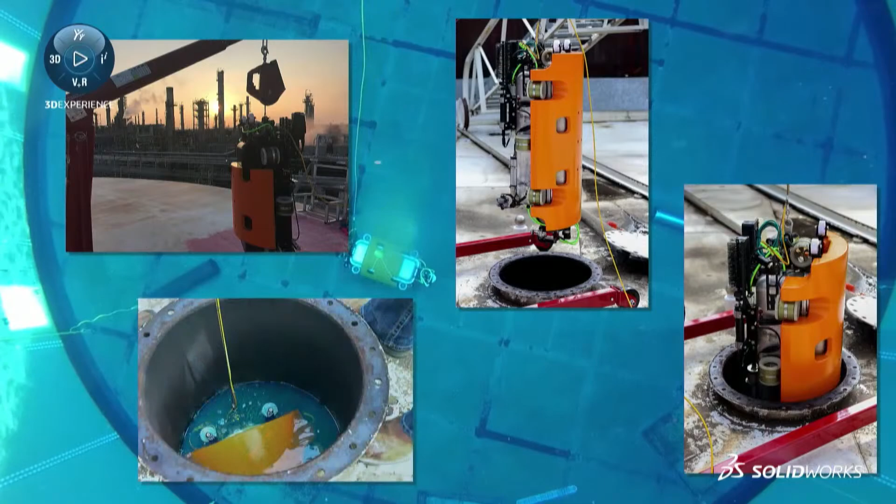Their design is focused on safety and reliability for these unique environments, providing maximum uptime and allowing inspections to take place when and where humans would have to otherwise wait for the tanks to be empty.

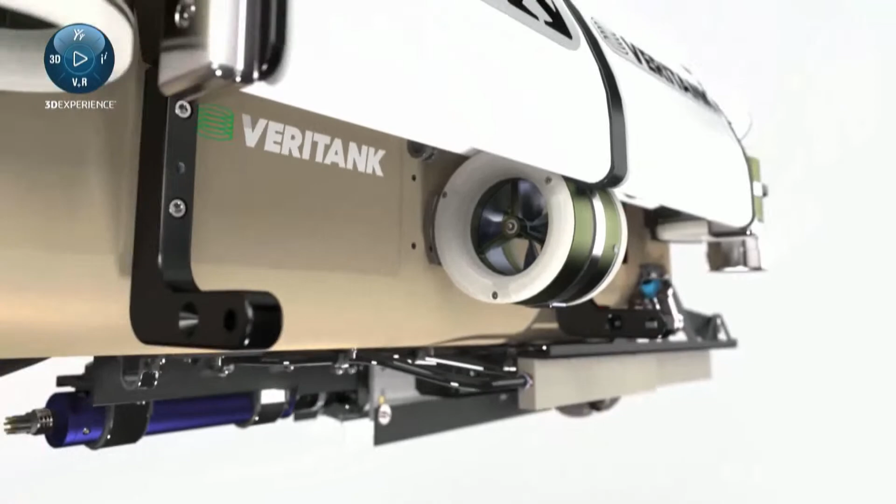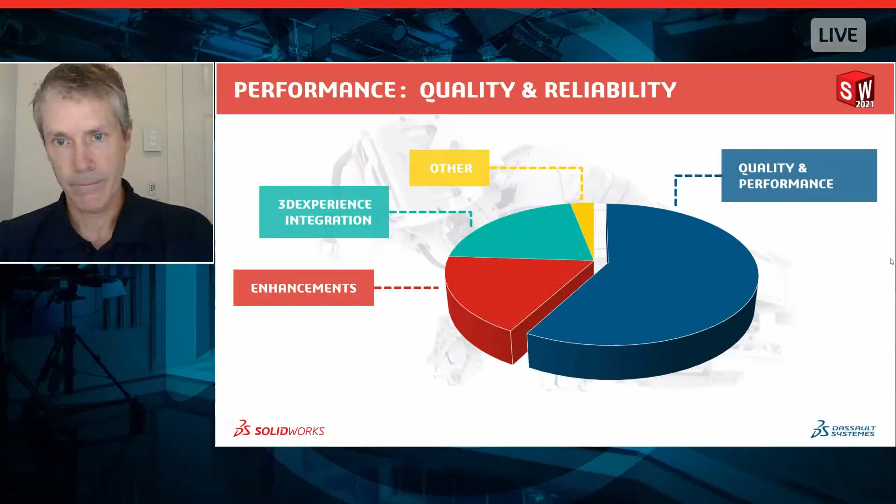Sure. I think the next slide shows that bugs come in with all different kinds of bug types. Maybe it's a workflow bug, maybe it's a behavior bug where it's not functioning properly. So there are different levels of bugs, and we try to categorize things to help us prioritize what to work on. We have other metrics that help us prioritize, related to the number of customer hits on a bug and how critical it is, and so forth.

So what you see in this graphic, things to the upper right are the most critical bugs—those that get the highest priority. We've done a good job historically staying on top of those and fixing them for customers. But the backlog of the other bugs, not in that top quadrant, has grown over the years.

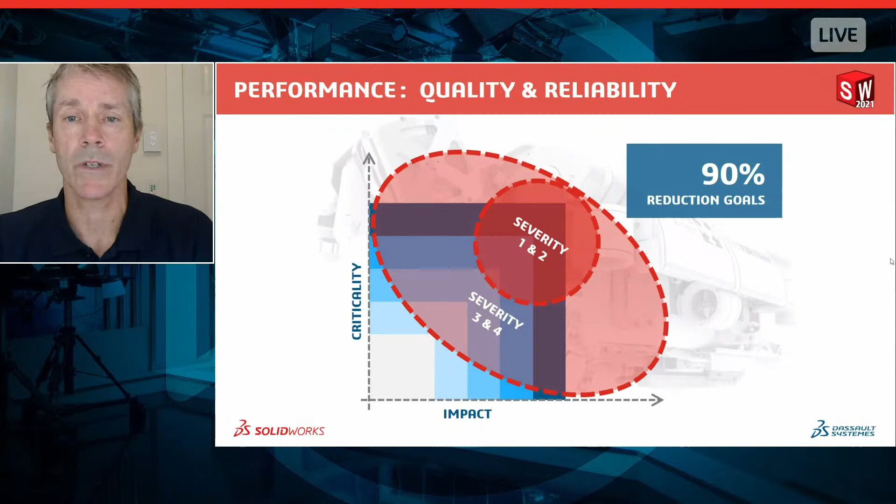So we have a backlog of those bugs, and what we're showing here is a goal we have—a 3-year goal, and we're just past halfway through it—to drive down the bugs shown in the circles, what we call severity 1, 2, 3, and 4. Those are medium and high impact bugs, workflow bugs, crashes, or any other bug of that type. So the goal is to drive down the backlog to 10% of what it was when we started. It sounds aggressive, and I think the numbers show it.

You've shared some feedback and data with me about what this means in terms of our investment into this, and how customers will really gain an immediate benefit. One of the things we see this year is a substantial increase in the number of these bugs that you guys have closed. These aren't necessarily things that have a button or a feature associated with them—this is really just the software responding and acting more how our customers anticipate it will. Is that correct? Can you clarify that a little bit? Like, these aren't necessarily features that improve performance or quality, these are just fundamentally making the software work better, correct?

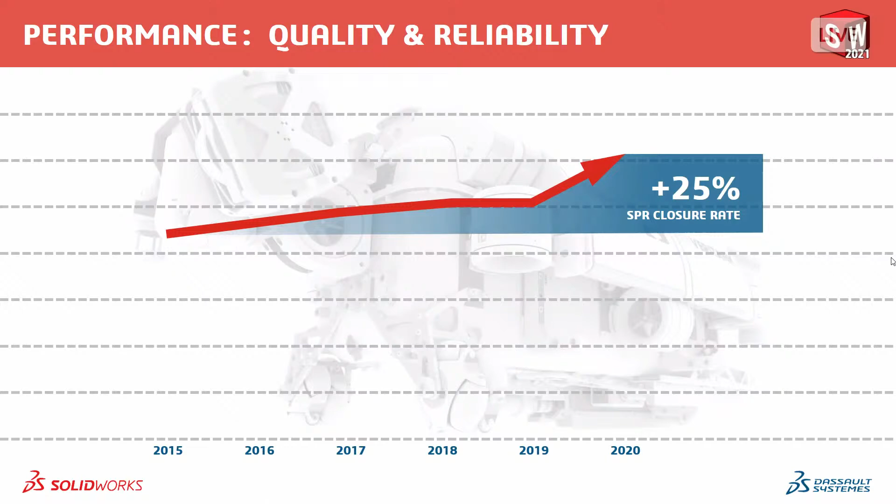True, yeah. What we're showing here is really bug-related stuff, not necessarily performance—there are performance bugs, but this is a graph showing the quality-related stuff. I looked back to see how we're doing with this renewed focus, and I looked back 10 years. Developers have actually fixed more bugs in the past year than any time in the past 10 years. You can see the graphic here—we're not showing 10 years, but it's a 25% increase over what you might have felt 5 years ago. That's going to make for an amazing release for everybody using the software.

Now, one of the things we also want to talk about is performance. Something we introduced last year was called enhanced graphics performance. Last year this was an optional feature inside the software that you could enable or disable. Can you tell viewers at home who maybe don't have SOLIDWORKS 2020 yet, or haven't enabled this, what enhanced graphics performance is?

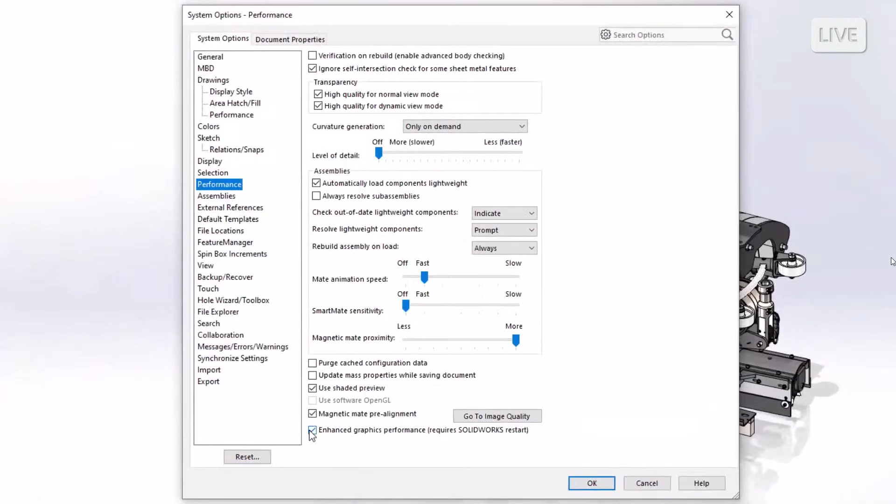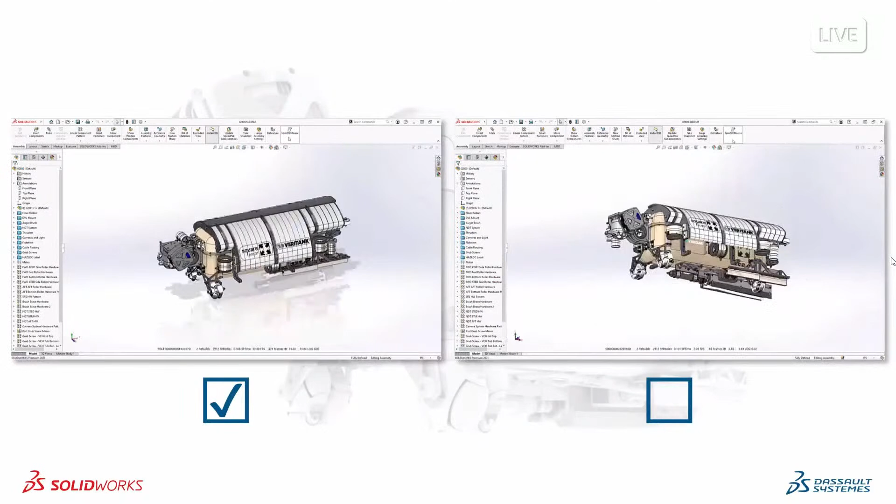Sure. Yeah, so we took a multi-year effort to basically re-architect our entire graphics engine—that's what you'd see in the model screen area, not the UI, it's the part and assembly display window. We've re-architected that, with a team of people working on it for quite a while. As Jeremy said, we rolled it out as a beta in 2019. It's available to everyone in 2020, where you can turn it on. And in 2021, it is on by default now. You can see here some of the performance improvements—the graphics team has done a fantastic job, and what you will see is a performance improvement. That's the biggest impact that customers will see.

If you haven't enabled graphics performance, I highly encourage you to do it. You'll see a lot of places in the software where it's being impacted. New in SOLIDWORKS 2021, we're continuing to augment enhanced graphics performance.

One of the new things we've seen is better leveraging the GPU for calculating things like silhouette edges, and I believe that's one of the new things here as well, in hidden lines removed and hidden lines visible mode. So kind of like what you saw there, we're continuing to invest in this technology. That's the plan moving forward, right, John? We're going to continue to invest in this graphics performance technology.

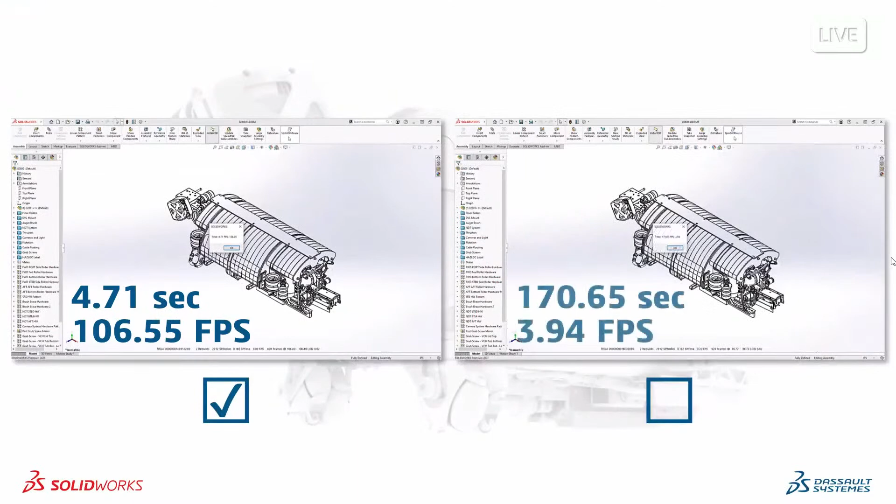Yeah, absolutely. Sid and the graphics team already have a plan. We're starting up on the next major release, and we've been enhancing it since we released it last year. So in 2021, we've added occlusion culling, and we've improved the silhouette edges you mentioned, done on the GPU, and we've done the re-architecture for drawings as well. So you'll see a very large improvement in the performance for drawings.

Yeah, so occlusion culling is interesting. This was something the video we had on screen is actually something with a special developer option, we were able to freeze what was being rendered on screen. So it's actually really intelligent - not only are we letting the graphics card handle a lot more of the work being done, but we're also being much more intelligent about how we're doing things there.

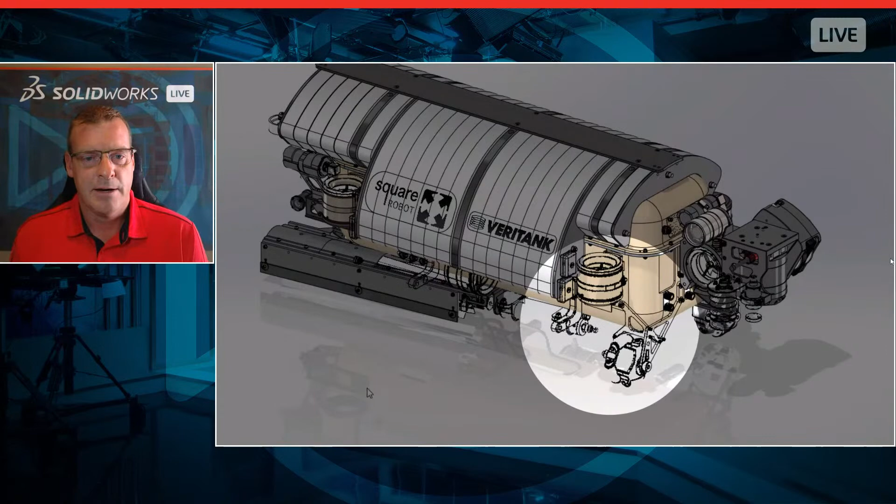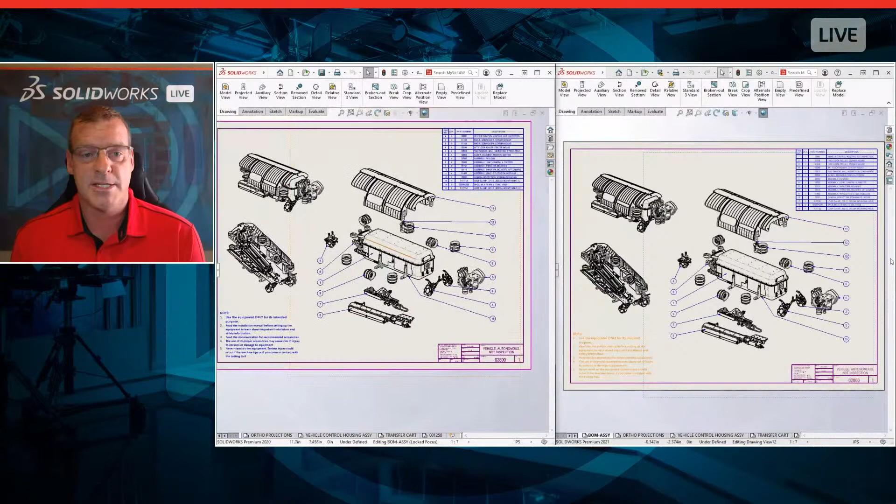You had also mentioned drawings as an area we're focused on. New in SOLIDWORKS 2021, all this great technology is now being handled in the drawings environment as well. So users who are doing large complex drawings are sure to see massive graphical performance gains while working inside of your drawings. This is just an example again of what it kind of felt like without graphics performance enabled versus what it looks like with graphics performance enabled.

This is really cool stuff, John. I know Sid is really the guy responsible for this, but I think you've iterated it. This has been a long-term commitment, and I think our customers are really going to benefit from this for the long haul in what we're investing into this.

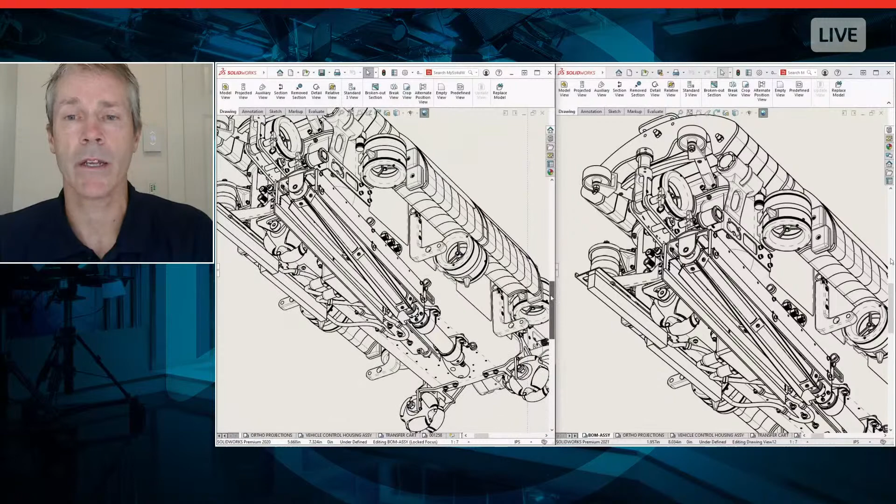Yeah, we've got a great team working on it, and it's been a huge focus for us for the past couple of years. It's really nice to see it hitting the street and on by default, and we've seen a lot of feedback during beta. People are feeling it - you're gonna feel these performance improvements this year, especially in drawings, since it wasn't even enabled last year.

So for anybody interested in learning more about this, you'll want to make sure you have the latest certified graphics drivers for your certified graphics card enabled. You can go to the SOLIDWORKS support webpage to check that your graphics card has the latest graphics driver. I believe OpenGL 4.5 is the one requirement you have to have in your graphics driver to really take advantage of all of this.

So John, this is really exciting. I think you mentioned it already, but it will take advantage of the GPU, which is a change compared to several years ago, right? We wouldn't always take full advantage of the GPU. So the better card you have, the better performance you're going to get. We are maximizing the GPU, which is a critical piece of your machine.

Customers who always invest in a really strong and powerful graphics card are definitely going to see big performance increases with this.

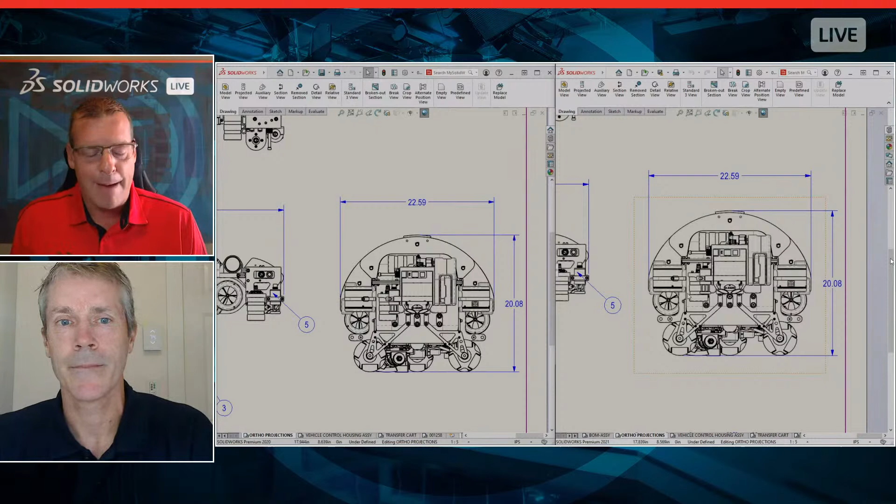So John, you guys are kind of at the end - you guys are wrapping up your development cycle for SOLIDWORKS 2021. Do you get to rest, or what's happening now? Or are you diving right into the next release?

We are diving in. We have our R&D kickoff meeting on Monday for what we're planning to do with 2022. The planning is done for the first portion of it, and we're starting work next week. So exciting! Keep going, John. Well, it never ends. Hopefully we have you here again next year when we're looking at SolidWorks 2022. Really excited for this release, but let's not worry about what's going to happen a year from now—let's focus on the great release here.

We have a part here that we want to create a cut and pattern that cut around. We have a sketch available, but you'll notice the sketch color and the part color are very similar. In SolidWorks 2021, we make it easy to find that particular item to change its color by adding this column of colors here. It's a nice delighter—we can change that color to something a little more contrasty.

Now, before we actually create this cut, I want to show you one exciting enhancement: you can collapse the command manager. This just moves everything to the top of the screen, giving you a lot more screen real estate so you can dive into your designs and really focus in on what you're trying to do.

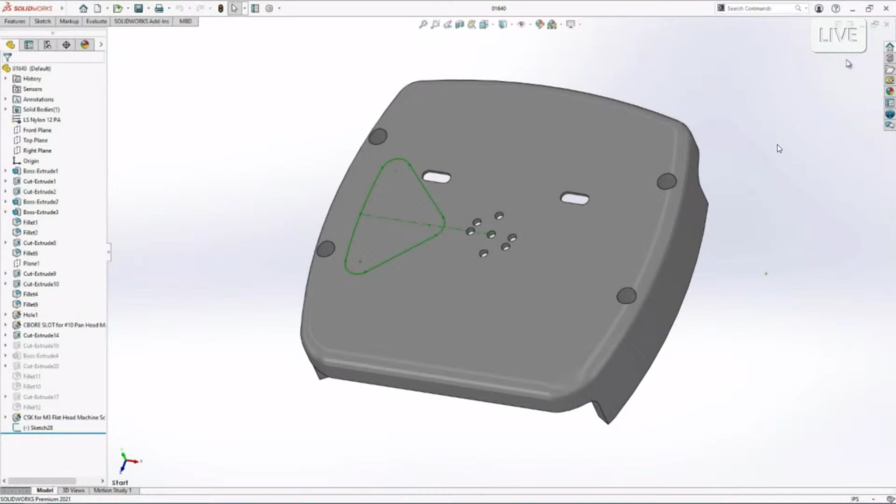I absolutely love this, Mark. I have a really large format monitor—I can see myself collapsing the command manager, maybe collapsing the feature manager tree. But unlike going full screen mode, I still have access to that command manager up at the top. Maybe I can call this stealth mode. Yeah, definitely you can call it stealth mode for sure.

If we want to get even more stealthy, there are some items at the top of the screen, our quick access tools, that we might also want to remove from the user interface to reduce clutter. We can put those in the command manager now, and those are kind of hidden from the screen as well, minimizing our user interface. We still have access to all our tools at the top of the screen, but a better, faster way to work is using that S key keyboard shortcut, which most users will be familiar with.

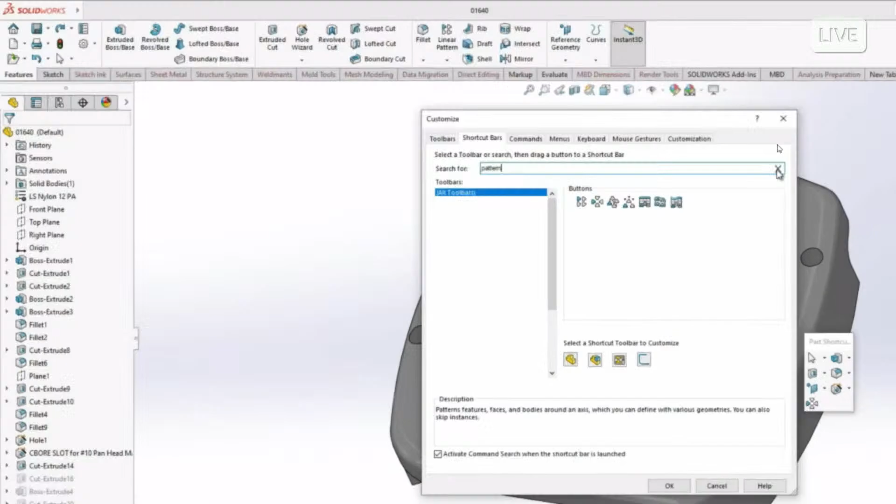New in SolidWorks 2021 is the ability to search for these commands now, rather than having to pick through a big list. We can search through those, add commands like the circular pattern to our toolbar, and customize our toolbar all over the user interface very simply. So here you can see I'm ready to work—I've got all my commands right where I need them, right at my fingertips, using that S key keyboard shortcut.

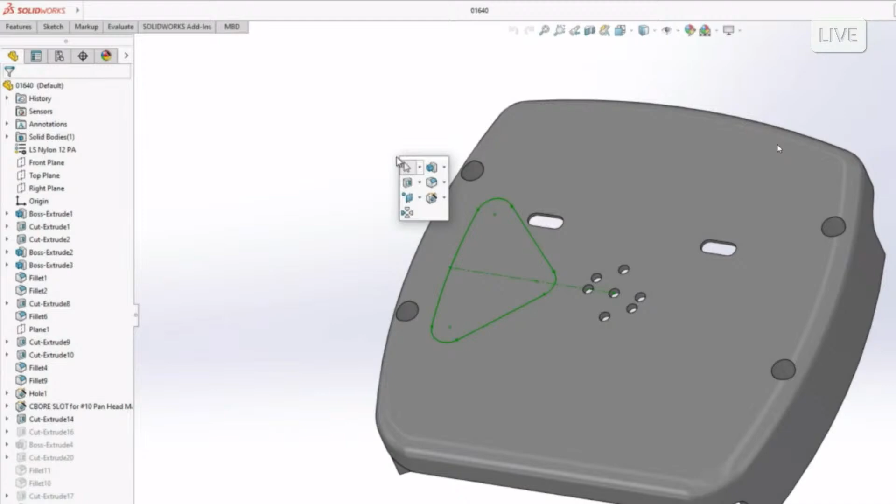That is so convenient. There's so many times where we're wanting to customize our interface, looking for the command that we want to add to the shortcut menu—this makes it so much easier. And for those who might not know this, you not only have the shortcut menu, but you also have command search in the upper right-hand corner. This really brings that whole idea of not needing to move my cursor all over the screen—it's really going to make me focused in on my work.

As you watch me perform some of these tasks, I'm only going to use the S key shortcut toolbar as well as the right click menu. I'll create that cut quickly through all, then use the S key keyboard shortcut to pattern that around the face and confirm it. Not only do we not have to go back up to the command manager to grab those tools, because we were able to customize our user interface, but I was really able to focus in on my design and get to work and be very productive.

So now I see why you actually hid the command manager with that new option. That's because you're able to do so much with the shortcut menu right there. You really didn't even need to access the command manager while you were doing that.

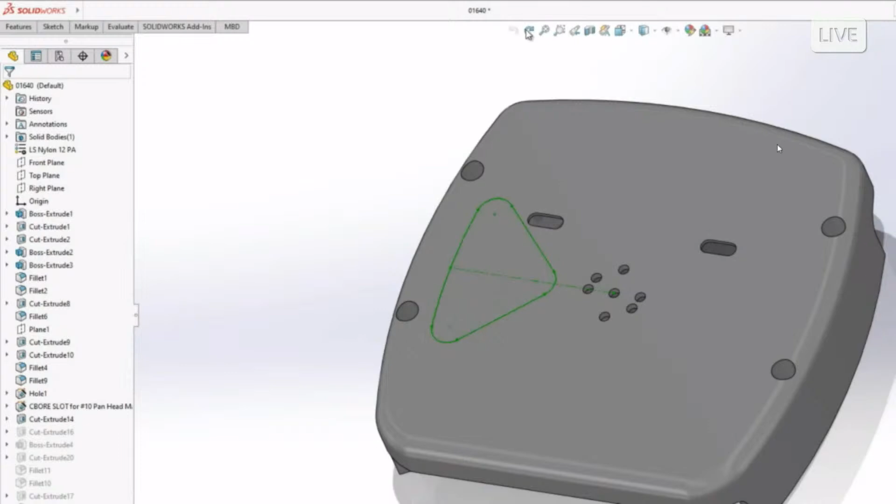Yeah, that's right. One last thing I really like: I use undo all the time because I'm not perfect, I make a lot of mistakes when modeling. Something really exciting here in SOLIDWORKS 2021 is that if you undo a feature, maybe one too many, you now have redo. So you can just get those features right back. You don't have to recreate them, and that saves a lot of time.

Yeah, I think users will really appreciate that. I know when we introduced unlimited undo all the way back to file open, users were really excited about that. I'm going to assume we can use the hotkeys Control Z and Control Y here. I remember you could just undo and accidentally go too far. So now you're saying I can roll that back forward if I accidentally did that. That seems like a really useful thing for people who get a little zealous with a keyboard.

Yeah, and this works for most commands in the part environment. We have 60 plus commands that this works on. So with all of those enhancements, we're really just trying to help new users and advanced users alike customize and adjust their user interface to their liking, so they can focus in on their design and be super productive.

Well, one of the things we mentioned early on is we don't have time to show every new feature coming in SOLIDWORKS 2021. So when it comes to the user interface, Mark, was there anything you didn't get to show here that you would encourage people to attend a reseller event to learn more about?

Yeah, there's definitely one. There's this mechanism now where when you want to edit a dimension, instead of opening the property manager first, it just opens the modify dialog first. It sounds like a small thing, but because you perform that action so many times in a session, even just a couple of seconds here and there really adds up to a lot of time saved. It's a really amazing enhancement, something we didn't show today. And there's a bunch more.

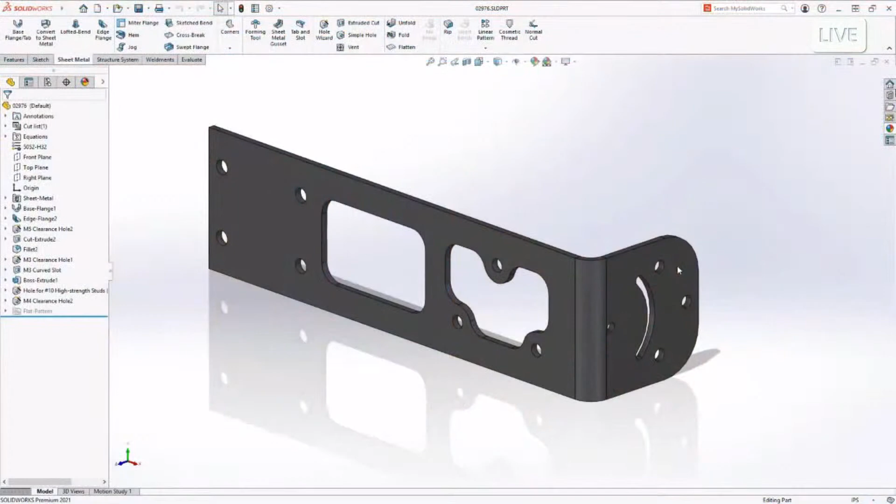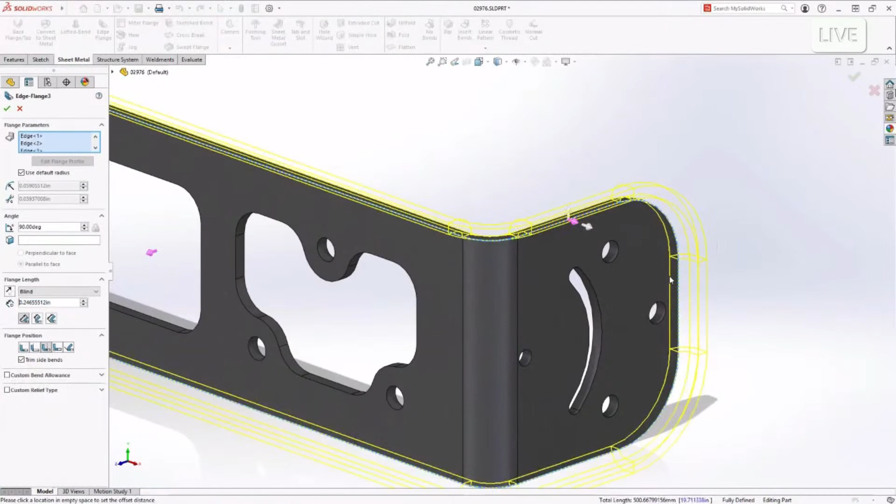In the area of curved edge flange, we've always been able to create curved edge flanges, but those had to originate from a planar face, like those ones on the right there. Now in SOLIDWORKS 2021, these curved edge flanges can be created even around areas like the bend area. You can see we get a nice, beautiful preview showing how that's going to go, so non-planar curved edges around non-planar faces, you're going to be able to create those.

All your customization tools are available, your position, your dimension control, all that stuff is there. This is really good, it'll really stiffen this bracket. We know there's going to be some stretch in that area, but this is what customers really wanted. Of course, we can flatten this, send it out to DXF, or send it over to fabrication. So that new curved edge flange, something customers have been asking for a long time, is really valuable.

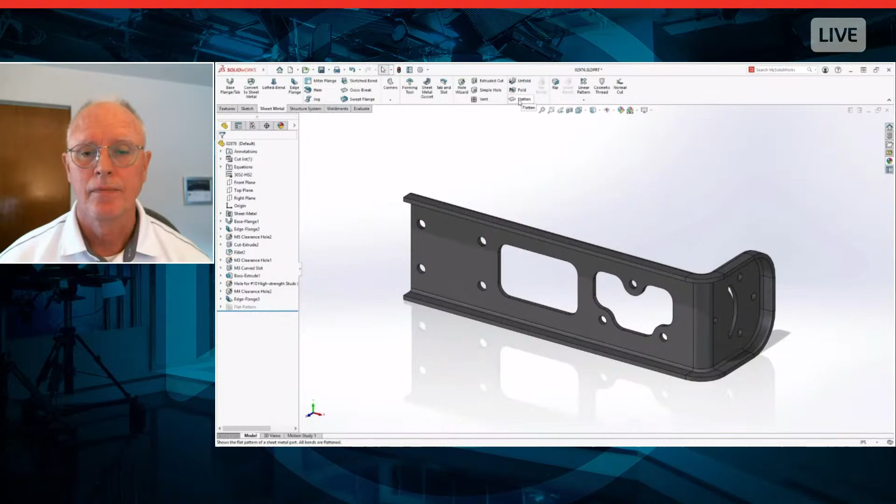Yeah, this is going to open up a lot of new design possibilities for our customers, being able to overcome some challenges they may have had in the past. Are there any other examples you can think of where the curved edge flange is going to come in handy?

Yeah, so that's a really good example for when you're trying to stiffen a bracket. In that case, we're adding a lot of stiffness to that bracket. It's also good for things like enclosures or covers.

In this case, we want to protect the electronic equipment on the inside. These are fully editable. We have some curved edge flanges in here, just change the flange length, change the direction, change the angle.

Everything is fully editable, just like any other edge flange that you're used to. And of course, we can flatten this as well, and you're going to get that correct flat pattern so that you can go ahead and manufacture this part.

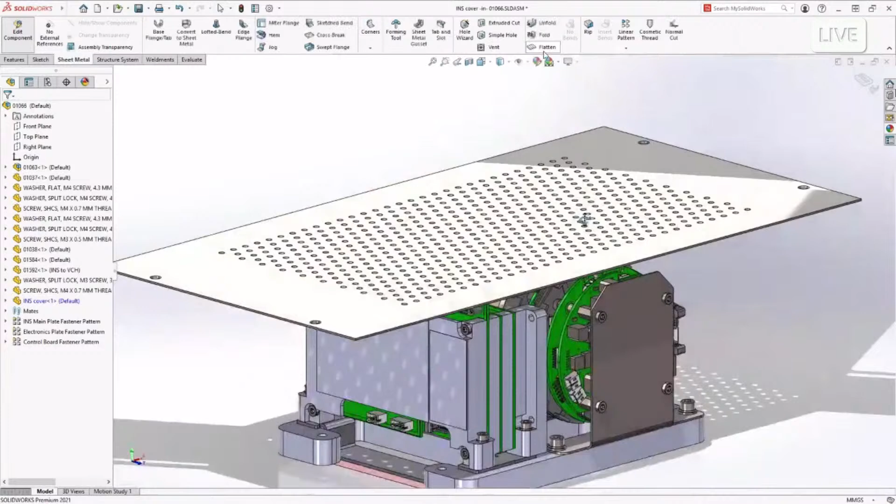Well, this is some really cool stuff, Mark. I like the sheet metal environment a lot, but I have to say, early on you mentioned the weldment environment as well, and I really, really like the weldment environment. What are some of the new things that users can expect in 2021 when it comes to working with weldments?

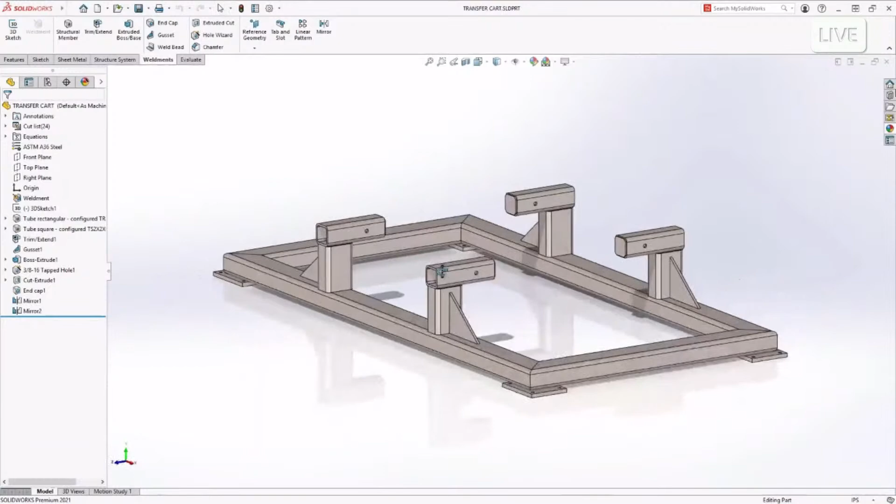Well, we've got a couple of things I want to show here. So when you're working with weldments, it's common to use multiple weldment profiles. Here we have a 2x2 square tube, and the rest of them are 2x3 rectangular tube. And we've always had this great tool to do your corner trims.

In this case, we have two end butt types where you can see how they trim to each other in the different areas. But we also have a miter trim. This was always problematic when you were miter trimming two cross sections of different members with a different cross section. Now we have a new option in the property manager called a flush miter trim.

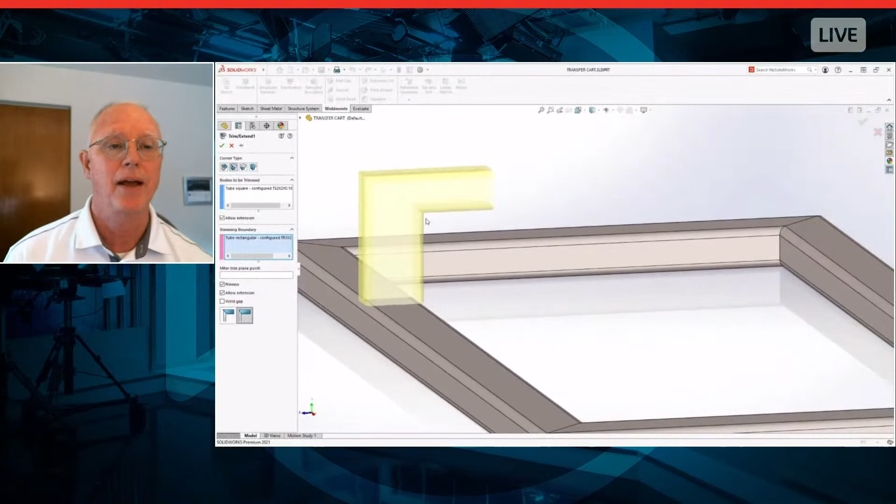Full flush miter. So you can see what happens when we do that. Think about all the time that was saved when you tried to create these in the past. In the past, if you had that equal angle miter trim there, you kind of had to go back and say, okay, I don't want this. I really want it to happen, but I don't want it to be equal angle.

I wanted to just make those two tubes flush. So you had to go in and do a little bit of extra work, maybe sketch and cut those two bodies individually, and it was just extra work. Now it's just another option in the miter trim tool.

So that's really, really pretty cool there. Yeah, that's a big time saver, talking about the workflow you used to have to do there. Not only that, it creates all these other features that you then have to manage. I love how this is all contained right within that mitered feature right there.

It's really going to simplify things. Now, Mark, you had also mentioned the ability to do some cool stuff with the user interface here. Is that what you had said early on?

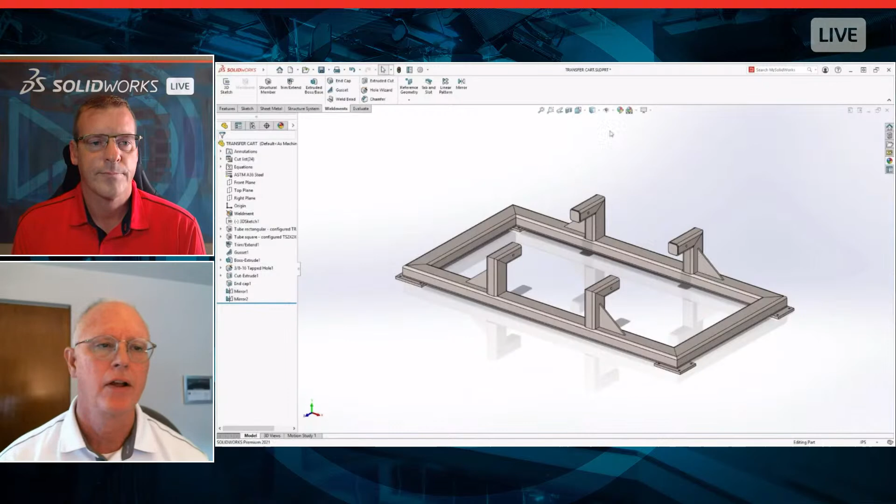Yeah. So for this particular part, let's say we want to paint it a specific color. We can go into the color palette and choose any variety of colors we can have. We can have multiple color palettes, choose from the spectrum down there and define our color. If we know the RGB colors, we can key those in. But oftentimes this color is specified by a customer.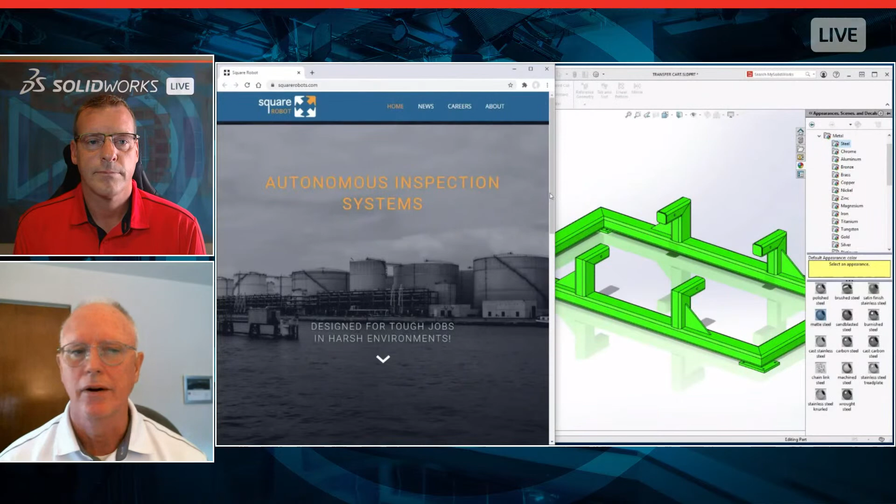Here we have the Square Robot webpage. You can go on their webpage, read all about their products and initiatives, but that color right up there is the one I'm really interested in. So now in SOLIDWORKS 2021, we have this new option, a little eyedropper there - that's a color picker. What I can do is just go ahead and grab that, drag it onto the color on that webpage or any image you have, and it's going to go ahead and apply that color. No need to use a third-party program to do that or extract RGB colors.

And a couple bodies down here that we want to add some additional color to, maybe let them stand out a little bit. We'll make those that orange color from the Square Robot webpage. Just using the color picker, we're able to extract that color immediately and apply it right onto those parts or bodies. So I think that's a really good time saver.

I've used a standalone executable program that I had to start up, click on - it's a color picker type of program, and I've used that in the past. I had to extract the RGB colors and type those in. Hopefully I don't make a mistake, and it's a big time saver there.

Yeah, I think that's a very common theme we're seeing with a lot of these features. They're time savers. One question about that, Mark - I saw you were able to drag it onto a webpage. Does it have to be a webpage, or can it be anything on my computer? Anything on your computer. It can be your desktop background, an image someone may have sent you, a Word doc, whatever you want. Any image on your computer, you can go and grab that from.

So custom properties are very important. You can capture a whole lot of information about the part, and that can be used in title blocks, bills of materials, in your PDM, and all that kind of information is there. But now in SolidWorks 2021, we have the ability to use equations in here.

So what I want to do is just create a cost estimate. I'm going to use the new equation option type. I have access to my global variables, any math functions, any properties that are already defined. In this case, I have an estimated finished cost that we've determined over the years to finish out a weldment type of part. We're going to multiply that by the mass - so it's just a simple, quick and dirty cost estimation of that part, coming up with $428.

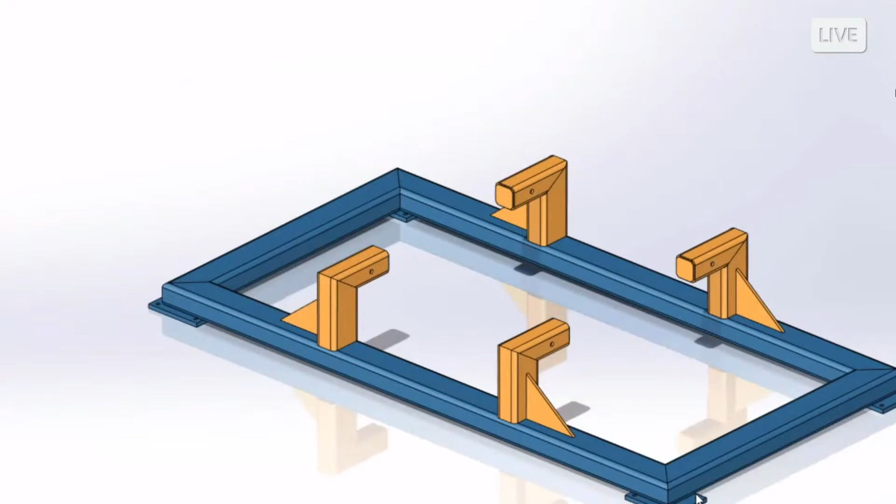And you can see that's a big time saver. Customers, it seems like from the forums and from the beta events and different events we've done so far, a lot of people are really interested in having these equations in their custom properties. In the past, you maybe did some equations and created global variables, and you could use the equations tool inside the property manager and then map that to a custom property. But in reality, it was a bit of a workaround.

Yeah, I mean, this really opens up whole new possibilities. Now, you had mentioned when you started this, you said cut lists as well. So we can use these in cut lists also? Sure.

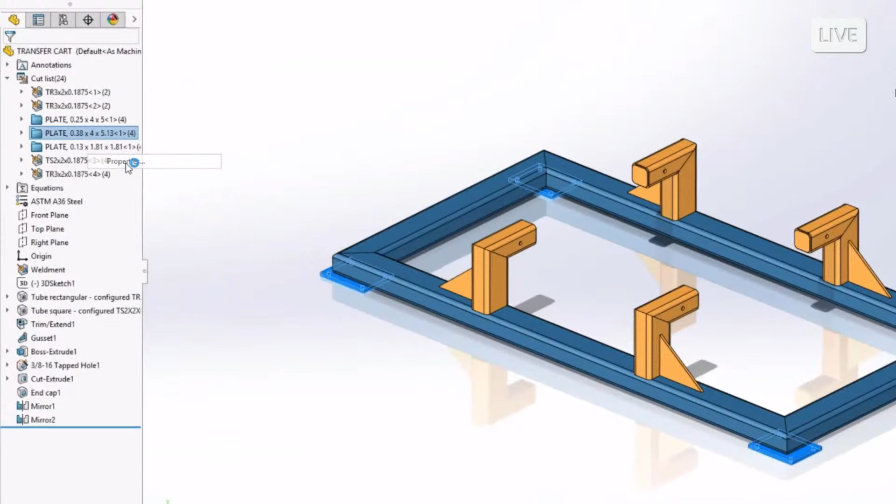We've got a weldment here, and you can see there's 4 plates on the 4 corners of that. I want to know the total length of all those plates together so I can order the proper material. So here we'll just use a total length equation, and multiply the quantity of plates times the actual length. These are just the bounding box length calculated from the cut list, and we come up with a little over 20 inches of that plate that I need to buy.

That's very important information, and it's right there in your equations, right there in your custom property. So you can capture this information, and it can then go on your bill of material for those items as well. That's really powerful there. It's saving a lot of time of having to do all that extra work in the bill of material, or in your equations in the property manager or feature manager.

Yeah, I recently had the chance to play with this, and it's really cool because now custom properties are solving for an evaluated value, and you have the number value. I've actually found you can also reference custom properties in equations now, so you can kind of go back and forth with them. There's a lot of things you can do.

Mark, I have to ask, we've kind of mentioned this a few times. We don't have time to show everything new in SolidWorks 2021 today. Was there anything else you worked on this release that you're really excited about that you want people to go to a reseller event to learn more about?

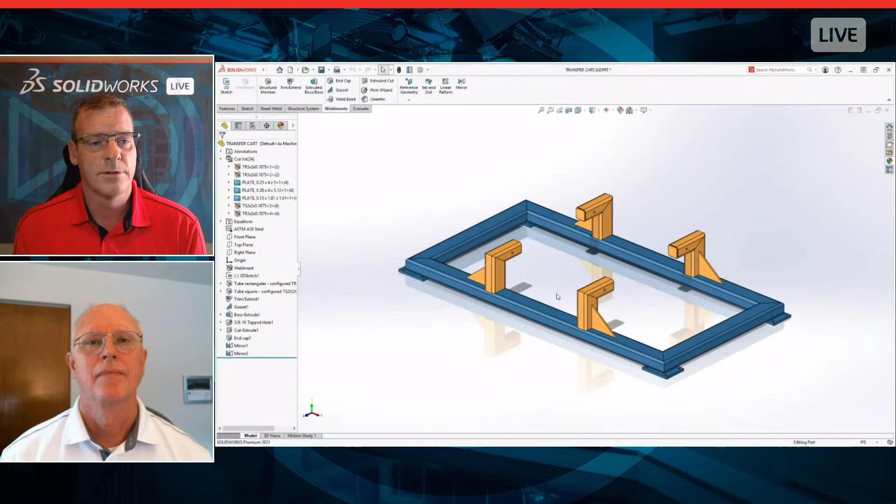Yeah, we did some things with the structure system tool. If you remember when I did the flush miter trim earlier with the weldments, that was something that actually existed in the structure system tool. And when you build structure systems, one of the benefits is you can put all different types of weldment profiles in there, and it doesn't really worry about it—it does that flush miter trim.

But I do like working in structure system for big, large structures, and it's very good. And now in SOLIDWORKS 2021, there's a new manipulator that allows you to position individual structure members much easier than it was in the past. So go visit one of your reseller events and make sure you take a look at that new capability for the structure systems manipulator.

All right, Mark. Well, everything you shared with us seemed like a big time saver for everybody. What I want to do is, I think we're going to come back to you in a little bit to talk about drawings. I want to go back to Mark Peterson to talk a little bit about assembly—we're kind of going through this user interface, parts, assemblies, drawings.

Mark Peterson, welcome back. Hey Jeremy, thanks for welcoming me back to talk about some assembly enhancements.

Yeah, so I think assemblies are one of these areas that people, at least I do, feel like is the fun part of SolidWorks—building assemblies, getting to see how all your designs come to life. What are some of the new things users can experience in assemblies in SolidWorks 2021?

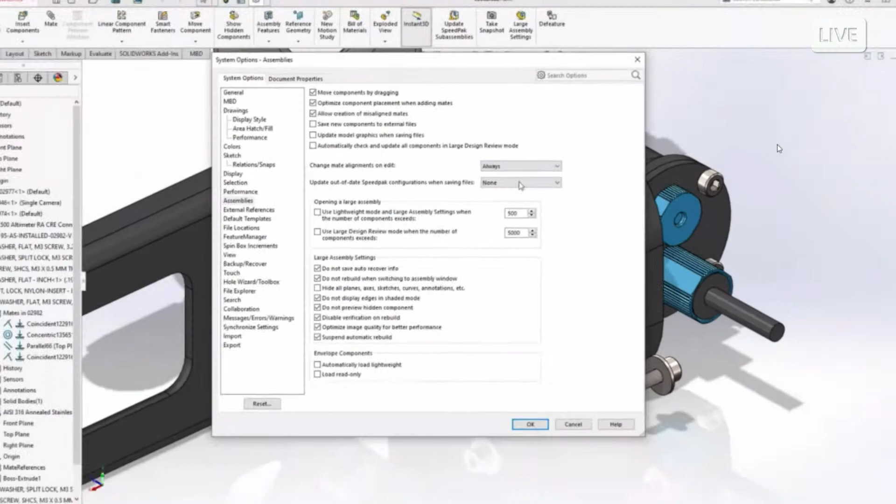Well, in SolidWorks 2021, we now have an option where we can say I want this option to always be chosen, whether that's a yes or a no. Just tell SolidWorks always choose that option, and then you never have to see that dialog again. Which I love. Anytime we see this sort of streamlining of workflows, allowing these dialog boxes to get out of our way. So now that we have our option set to always, we just right click on our mate and choose flip mate alignment, and then we're ready to go.

Mark, I have seen this dialog box so many times. Like you said, 90% of the time I just want to say yes, flip the components. The mate I just created is what I want. This is going to be a huge time saver. I don't have to click that dialog box, I don't even have to see that dialog box anymore. I love it. Yeah, absolutely.

There's other defaults we can set in SolidWorks 2021. For example, here we want to mate this to the slot. In previous versions of SolidWorks, we could mate to a slot, that's not a problem, and choose whether we wanted that to be free or centered in the slot. Now in SolidWorks 2021, we can choose a default for that. I'll show where that setting is in a second. Notice we also can lock rotation like we would expect with mates like a concentric mate.

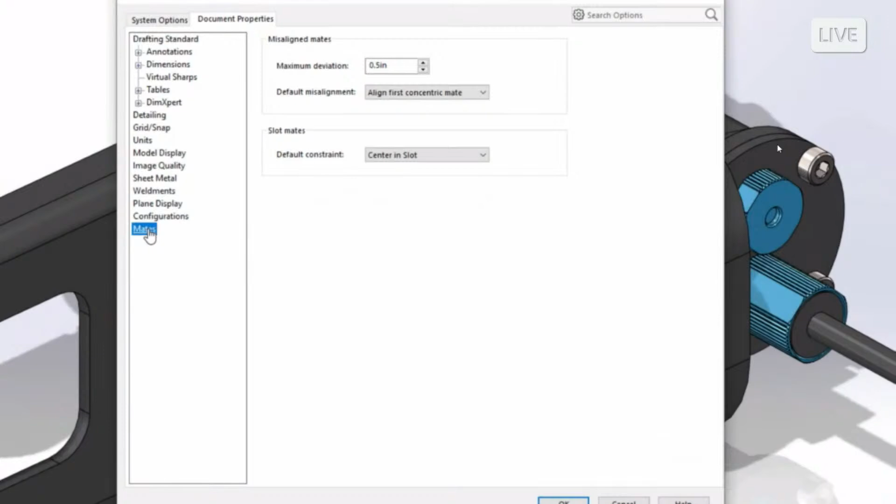So let's go here to our settings. We'll head over to the document properties tab and notice that we can now just choose which of those constraints we want to set as default. That way, most of the time, depending on your workflow, you just want one of those options. Of course, you can always override it. So it's just a nice thing to be able to put in your document properties.

Yeah, I love that. I love all these things where I can set it up the way I work most of the time. One of the things you mentioned, that's a document property. So for the users at home, when you install SolidWorks 2021, you may want to update your templates. I always recommend doing this every release anyway. I always go through all the options, make sure everything is set the way I want it when I come out with a new release. This is one of those settings you're going to want to update in the templates.

Now, Mark, one of the things I saw there on the screen is you had all this hardware down in the corner, but it was all different sizes. What was going on with that?

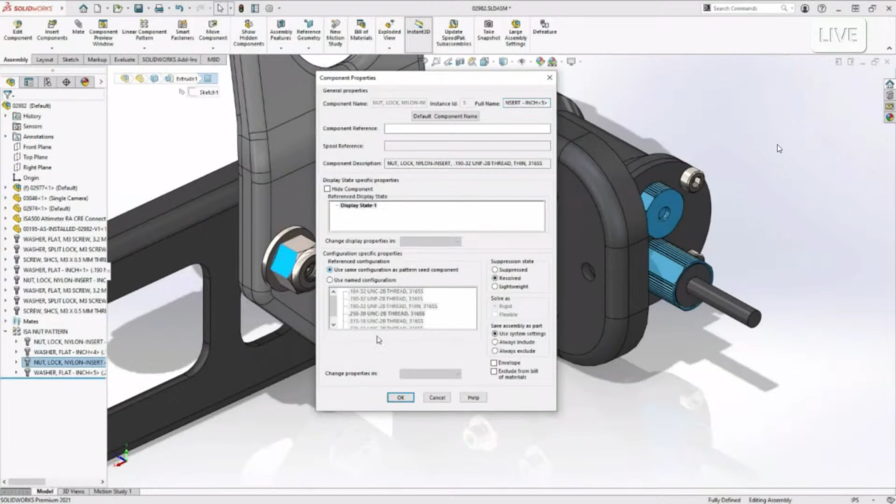Yeah, absolutely. So in the bottom left of the screen, we have a pattern of some nuts and washers here. In SOLIDWORKS, when you're assembling, it gives you the flexibility to change one of those instances if you want. You'll see the one highlighted in blue here is the seed of the pattern, and then we have these other component patterns here, and we can of course change those. Now in the component properties, we can choose to use the same configuration as the seed, and that can help there. But this is only 3 nuts and washers, so it's not that big of a deal. But if we had tens or hundreds of these, we would want an easier way to set this the same for all components.

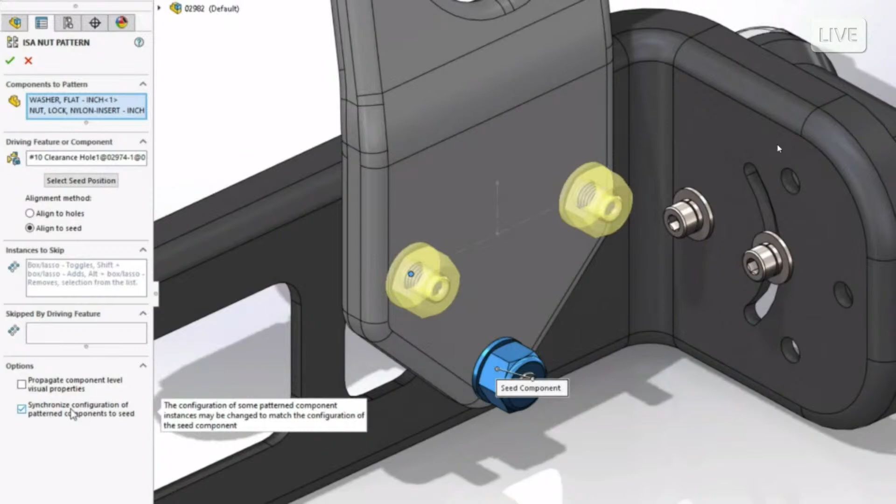So now in SOLIDWORKS 2021, underneath that component pattern, we have the ability to synchronize the configuration of the pattern components to the seed, all with just one click. Once we set that, we can go back and verify that you won't accidentally undo that by going back to the component properties. As you can see here, those options are now grayed out as you would expect. Finally, what we want to show is that if you do change that seed component configuration, it's going to propagate and update the other components in that pattern.

What I really like about what you showed there, Mark, is not only did it synchronize all those components, but it locked them down so you don't run the risk. You as a designer can add that design intent, saying I don't ever want any of the pattern components to change to a different configuration. So I think that's great.

What about different ways of sharing and communicating things going on in the design? Mark, anything related to that?

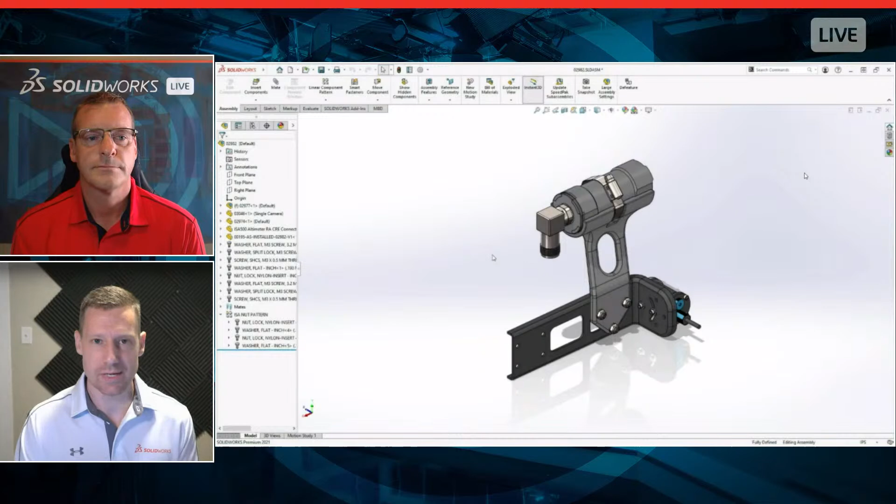Yeah, some of the most powerful things you can do in SOLIDWORKS revolve around evaluating assemblies, looking at things like the total mass of the assembly. We also want to show interference detection, which we've had for a long time - it shows where components may overlap in 3D space. But new in 2021 is the ability to export this to a spreadsheet, with the option to add thumbnails as well.

So what we'll see here is once we save that out, SOLIDWORKS goes and takes screenshots for us and populates a spreadsheet, which we see here. This is really useful - you can share it digitally, or print it out and bring it to a conference room to work with the rest of your team, depending on what method you want to use. This allows everybody to get together and understand whether these interferences are intentional, like in the case of a press fit, or if there's a design change that needs to be made, and who owns that design change.

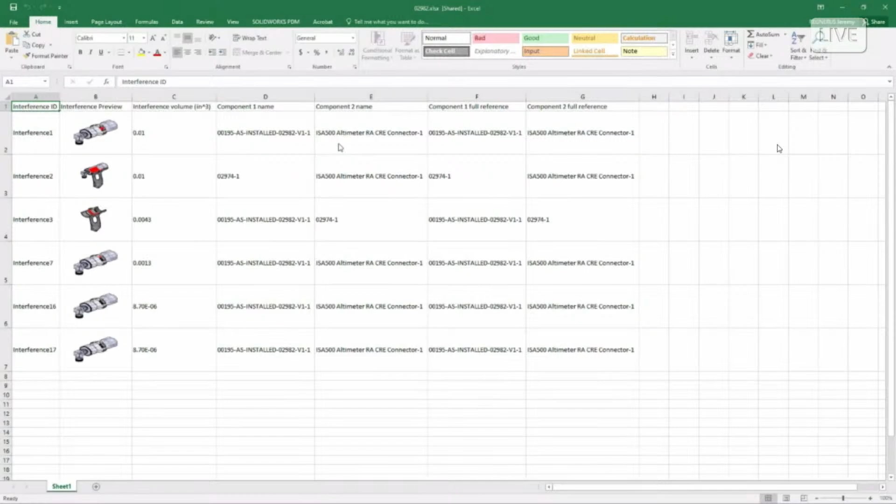Yeah, that's great. I especially love that it got such a graphical element with the thumbnails. Now, Mark, we talked early on with John Sweeney about performance being a major part of this release. What about performance in assemblies? This is one of the first places where users want to see performance improvements - general performance, like files opening faster - but are we doing anything new in SOLIDWORKS 2021 to help users with performance?

Yeah, absolutely. I want to show you one of my favorite enhancements for assemblies in 2021. We've had the ability to open assemblies in lightweight mode for a while, which changes the opening time from maybe minutes to seconds - amazing. But something that was always a little tricky is if you wanted to resolve some components, you'd have to right click and choose each component to resolve. New in SOLIDWORKS 2021 is the ability to just select the component and expand it, and it automatically resolves for you - it dynamically does it.

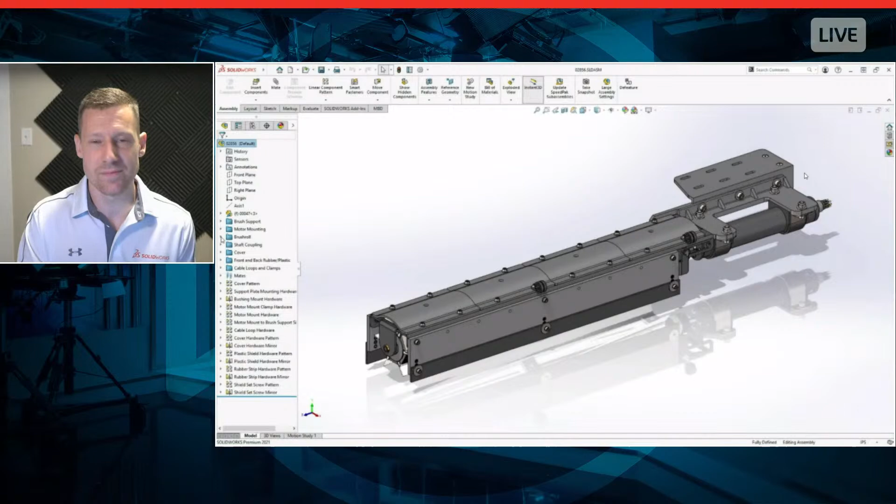It's so effective, it makes me want to open every assembly with lightweight mode, because there's no disadvantage to doing it. You get all the benefit of lightweight mode, but when you need to work on a particular component it dynamically resolves for you. I think users who have experimented with lightweight mode might have been hesitant to use it because they're always having to right click and resolve a component - this just makes that workflow so natural.

Well, that's great in terms of general performance. What about tools to reduce overhead on my computer or things like that? Are we doing anything there? Yeah, absolutely.

So we've introduced defeature in 2019. Just to briefly go over what silhouette defeature is, it allows you to simplify a component or an assembly into a representation of itself. So if you wanted to, you could send it to a partner you're working with and not give away all of your intellectual property. But it can also be used to improve performance of top-level assemblies.

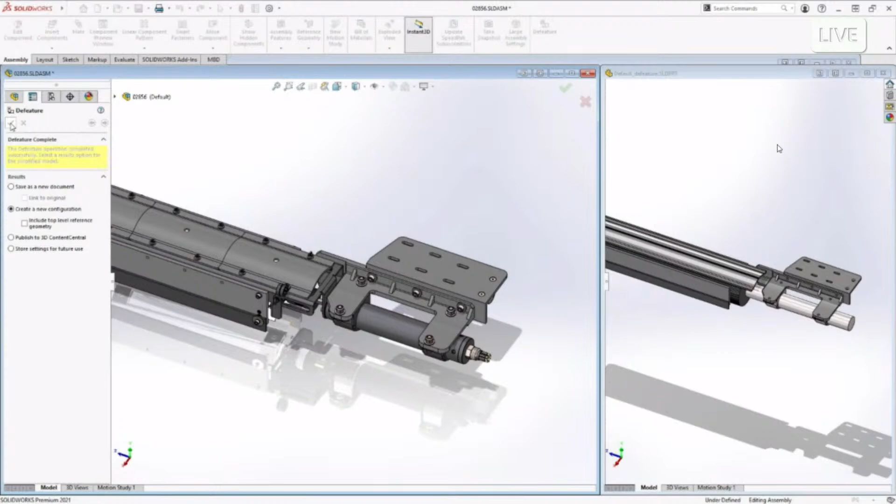So what we're showing here is I have a component that I've simplified, but new in 2021 is the ability to save that component as a configuration. Before, we'd have to save it out as a separate file, which made it a little bit difficult to implement into the top level assembly.

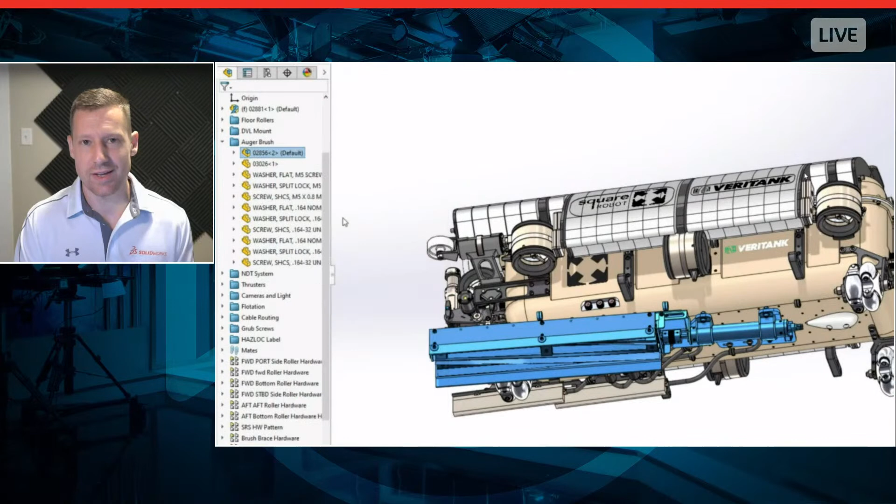So as we see here, we're going to head over to that top level assembly, and we've got our component rotated here underneath, and we just want to replace that with that simplified representation. New in 2021 is the ability to simply right click, use as defeatured, and it quickly replaces that. No need to do any extra steps or use a convoluted workflow - it's just as simple as a right click away.

I love that. Not only can I just right click and change that, but it's a configuration, it's also not a separate file I have to worry about. That could be important if I'm using tools like PDM, data management, ENOVIA tools. I don't have to worry about this other file that is this simplified representation. It's just saved in a configuration right there.

And if you do that with several sub-assemblies in your top-level assembly, you're talking about some serious performance benefits there. It's just going to reduce that hardware overhead on your computer and allow you to get even more done. So that's it for me as far as assemblies. Again, there's a lot more.

One of the things we didn't show, and I really encourage everybody to check out your reseller events, is there's a new way that we can dig into circular references. I know this is a more advanced thing, but SOLIDWORKS does allow you to make circular references, unlike some other software, and sometimes you need to do that. But what if you didn't mean to? Well, now we have a capability that allows you to figure out those circular references, bring those to the forefront, so you can understand them more deeply and get those circular references resolved. So that's a really cool one. Looking forward to seeing those at the reseller events.

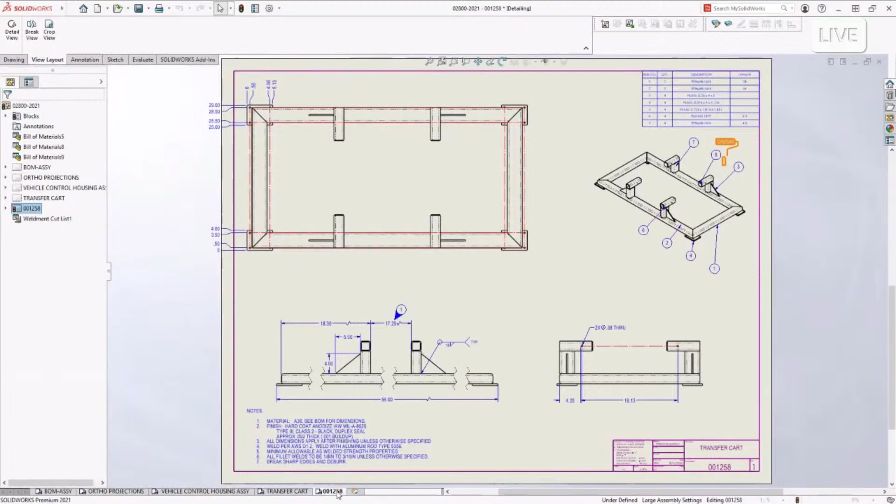You have access to all the sheets, and look how fast each of those sheets is loading - you just flip right through that. One of the key things about detailing mode, Jeremy, that's really cool is that I can send you my drawing here for you to detail. All I need to do is send you the drawing, I don't need to send the assembly or the multiple assemblies and everything that goes along with it. All you need is the drawing. Because keep in mind, what you're actually working on when you open something in detailing mode is you're just looking at the line work there. So it's just the line work on the screen, and it just makes it really fast, with all those graphics performance benefits that you and John talked about earlier.

There's detailing mode as well as resolve mode, or lightweight drawings. So basically you're saying I don't have to load the whole assembly up, it's opening kind of that last save mode of the drawing with all that line work. Man, that sounds like a huge time saver. So show us what's new in SolidWorks 2021 with this detailing mode.

We were able to add notes and edit those notes last year when we introduced this, but now existing notes can be edited too. So I can change this note here, remove some information, key in new values if there was a mistake made, and I'm able to quickly edit those notes. So that's one of them.

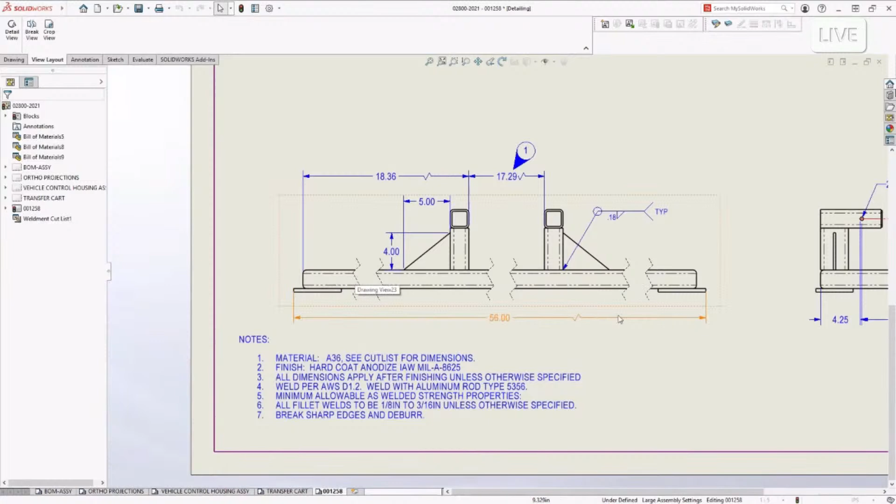Broken views, you can see this front view here. It's got some breaks across it, and also some foreshortened dimensions. So these are the breaks that exist in that view. But the top view hasn't been broken yet. Now in SolidWorks 2021, we can add detail views, break views, crop views, and even an empty view if you just want to do some sketching. This behaves just as you would expect. Remember, we're just cutting the line work on the drawing here, so think of it that way. All we're doing is cutting that line work and we're able to add that broken view.

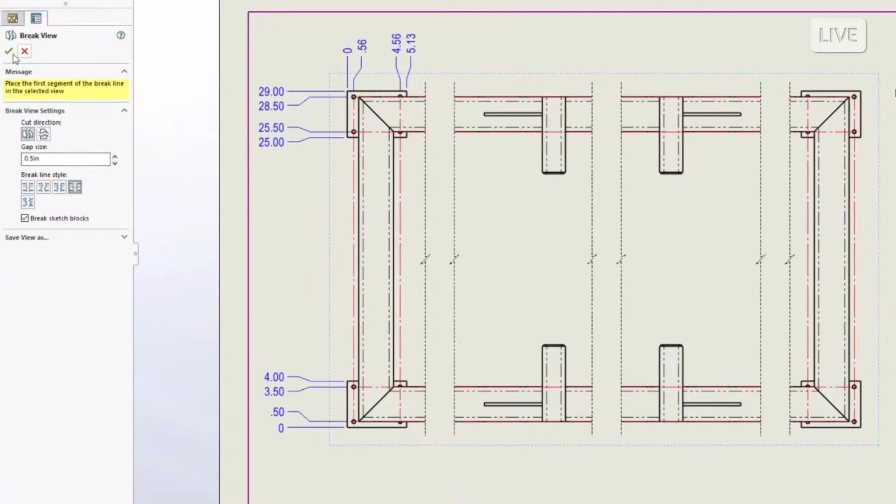All your tools for your break line styles, your gap size, any of that stuff is available as well. And you can also add crop views and detail views, and we'll show that a little bit.

Yeah, this is great. This is really going to change the way people detail their drawings. But fundamentally, when I first create the drawing, I still want to do that like I would a normal drawing, right? I set my initial views. Once they're done, I can save it and then just open it up in detail mode.

That's correct, that's correct. You can't create new views, you can't create section views. Section views still require the model to actually cut that cross section. So if you want to create a brand new view, but a detail view or a broken view, all we're doing is manipulating the existing view. A crop view, we're manipulating an existing view. A detail view, we're just kind of magnifying an existing view. So all we're doing is leveraging that information to do that.

There are, obviously, if your assembly went through some change process and you had to make changes, you're going to want to open it up lightweight or fully resolved so that all those changes are reflected in each of the individual views. One of the cool things about detailing mode, Jeremy, is all these edits I'm making, when I hit save, I save this drawing. You can make these changes, send it back to me, and next time I open it fully resolved, all these changes are going to be there.

Cool. You had mentioned detail views, can you show us how you'd make a detail view in this detailing mode? Yeah, but first we can see these ordinate dimensions we have up here. We got some ordinate dimensions that were already existing there. If we want to add some additional ones, right click now, we can add existing ordinate dimensions to this detail view here. So that's kind of cool, the way we're adding those new ordinate dimensions.

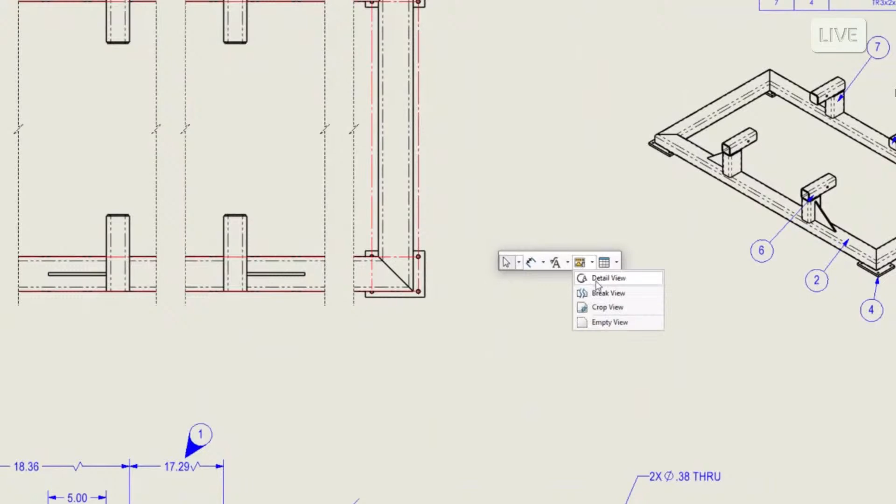Detail views, if we want to add some information in this lower corner, it's just adding a detail view, very similar to the way you would do it if your drawing was lightweight or fully resolved. The other cool thing, Jeremy, is people want to create hole callouts. Hey, I got these holes, I want to make a detail view, hole callout there, no problem. Foreshortened dimensions, it knows the total length of that line, it knows how to create that foreshortened dimension too. And we got some other things coming with dimensioning too, I can show you.

Yeah, I'd love to see it. First question I have is, can I edit existing dimensions in detailing mode? You can edit dimensions and change its properties, but you can't double click that 28 and make a dimensional change. Remember, you have the line work on the screen here, that's all you're working with. You don't have the full model behind it like you would inside of SolidWorks, but you can edit those dimensions and make property changes. Let's take a look.

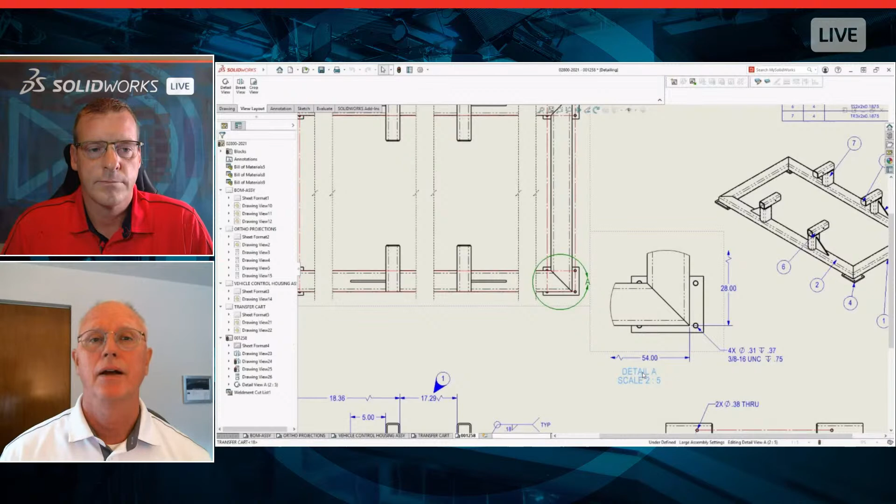Maybe we need to put some tolerances on that. You notice in the property manager, I can change the tolerance. I can change its precision.

This dimension right here is not dimensioned right. It's dimensioned to the outside of that hole there. Instead of that, we're going to dimension that to the center.

Notice that in the property manager, all the tabs are available, so I can make all those changes that I might need to make. So those are just a couple of things for detailing mode that we added and extended. And actually, Jeremy, some of these things have been backported into the latest releases of SOLIDWORKS 2020. So if you're using SOLIDWORKS 2020 today, make sure you'll be able to take advantage of some of these editing capabilities in detailing mode as well.

I mean, that's great. That just shows a lot of value in your subscription. You can go download that latest service pack. You can already start to take advantage of some of this stuff. This is going to be great for users.

I've been asking everybody, is there anything you didn't get the opportunity to show today that you would encourage people to go to a reseller event to learn more about in regards to drawings?

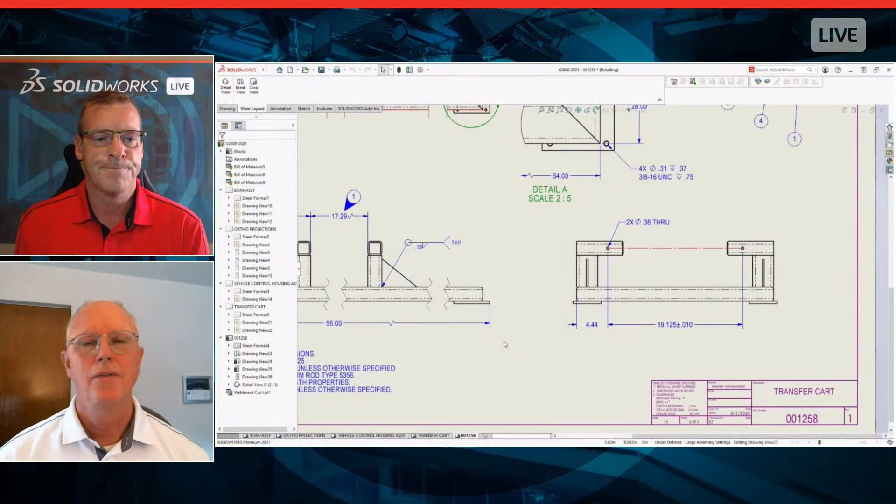Yeah, well, a couple of minor things you can see on the left-hand side of this drawing. There's a VDA balloon. VDA balloons are now supported, and those get pushed over into SOLIDWORKS Inspection. That's very important for a lot of the European automotive suppliers there. They needed those VDA balloons. I know that got a lot of interest from a lot of people in Europe for being able to create those as well.

All right, Mark, thanks for sharing all this exciting new drawing stuff with us. I want to dive into something else. We've looked at this design process, and one of the things I think we actually kind of skipped over, and it should have happened before drawing, is simulating your designs and understanding how your designs are going to perform in the real world.

To help us understand what's new in SOLIDWORKS 2021, I want to welcome Michael Steves, our resident expert. Michael, welcome. Hey Jeremy, thank you, I'm happy to be here.

And we're going to talk about SOLIDWORKS Simulation and Flow Simulation. I got to start off, Jeremy, 2021 was a big release for SOLIDWORKS Simulation. It's easier to use, it's faster, and we've improved the accuracy as well. So new users and existing users will find something I'm sure they'll enjoy.

Well, I'm excited about this, Michael. As you know, you're our simulation expert. I consider myself a novice to intermediate user. There's all these areas when I'm working inside of SOLIDWORKS Simulation where I kind of question, what should I do next? Do we have any tools that will help somebody like me simplify that process in setting up and performing a simulation?

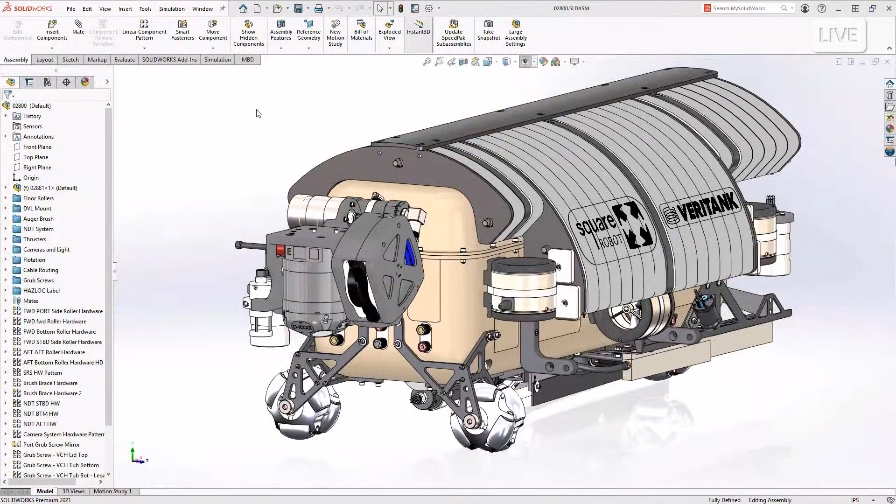So let's take a look at some of this that we have going on here with our contacts, and we're using that square robot model. Taking a look at this, we have a structure going on in the corner there, where there's a few plates, some hardware, and taking a look at doing a structural analysis of this, we'll just assume that everything's bonded together right away using the global setting.

And actually, new in 2021, there's some additional properties for gaps and stabilization. This is, again, kind of the default properties here are doing a lot of work for you as the user, overcoming some common challenges that stem from the CAD geometry. So in this case, there are some small gaps between some of these components.

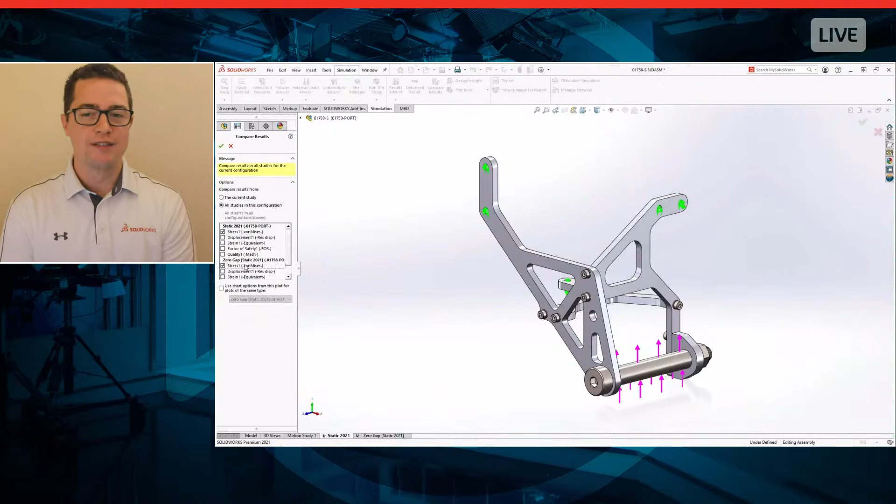So let's compare this to another study where we've set those properties to 0 to mimic previous versions. As you can see, we've easily been able to overcome this by automatically capturing the interactions between those components, even though there were some gaps between the CAD geometry that would not have been automatically detected. Now in 2021, they're automatically detected, so you can get good quality results right from the get-go.

Yeah, I mean, this is one of those instances where I've always kind of wondered how I deal with those gaps and things like that. I might not necessarily know all the settings. This feels like for somebody who's kind of first getting into SOLIDWORKS simulation, or even somebody who's been using it for a long time and doesn't want to be bothered with that whole setup process, this feels like a big time saver and an aid to help me make sure that I get my simulation set up properly.

Well, sure enough, and I know there's a lot of questions on, okay great, it's faster, but how accurate is it? And that's where the contact definition, how the contact is solved between components and those interactions, is greatly improved with 2021 as well.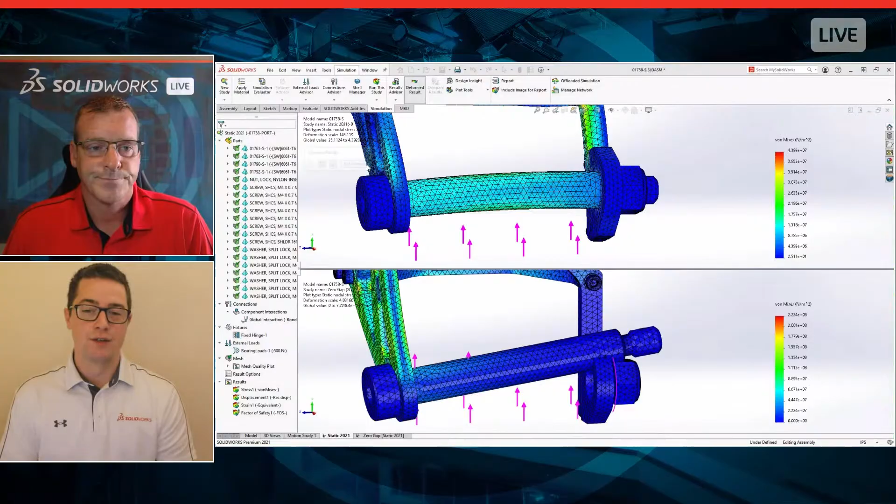So what that means is you can solve more types of problems on your machine and also get a faster result without sacrificing a lot of quality, especially in the areas of concern.

So let's take a closer look at some of these areas in the model, because with 2021, we've added additional support for where mesh nodes aren't lining up. There's also been geometry correction that's been added for various types of interactions between these components, so we're accurately capturing the interactions there.

Again, really nothing more that you need to do as a user, it's just giving you that improved accuracy. But of course, meshing does come into play.

So new with 2021, there's a new diagnostic tool to isolate these poor quality elements, so it makes it faster than ever before to identify those elements and fix them. There's also a built-in mesh helper to optimize the mesh.

And the last thing I want to mention here with simulation, Jeremy, is if we take a look at the properties of the study, you'll notice that it's been simplified. Because of some of the changes to the definition of contacts and interactions, that means we don't necessarily need some of these extra options in the user interface.

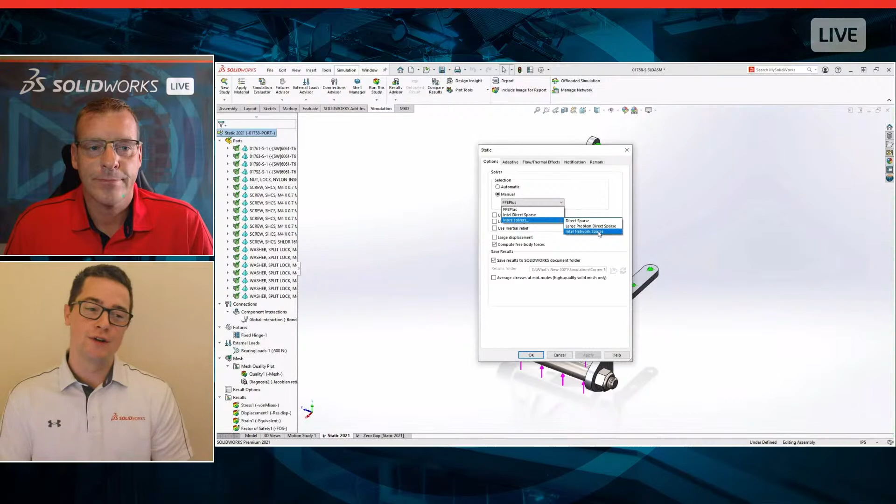So in the case for picking a solver, that's the only one there, the automatic solver. The algorithm there has been optimized based off of the study that you're trying to solve, and also the computer that you're using to solve. So it's doing a lot of different balancing acts automatically to pick the right solver for you. But if you're an advanced user, you still have those additional solver types available.

I mean, that seems like it's really going to streamline my workflows, anybody's workflow using SolidWorks simulation. But I love at the end how you mentioned the automatic solver is going to do a better job understanding what hardware I have available in combination with this type of study I've set up. It just sounds like it's going to help me get to my end results a lot faster.

Now, one of the things you had mentioned earlier on is simulation and flow simulation. Now, flow simulation is really exciting. What are we doing new in flow simulation in SolidWorks 2021?

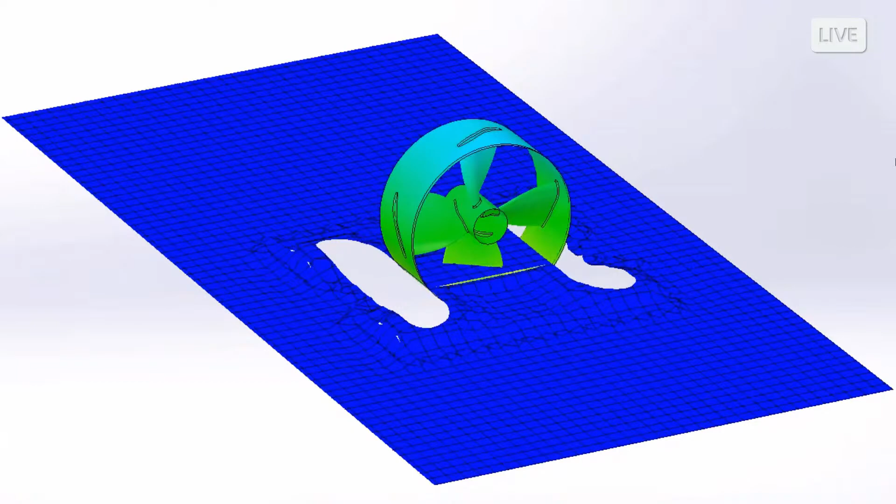Yeah, so I get really excited about this one. With 2021, we're actually combining, the one I want to focus on here is the combination of two types of physics that we've been able to solve before, and that is free surface and rotating regions. So we can see some of the results here already. I mean, just being able to have that rotating region and that free surface, fantastic. Think of just the mixing simulations that you can do.

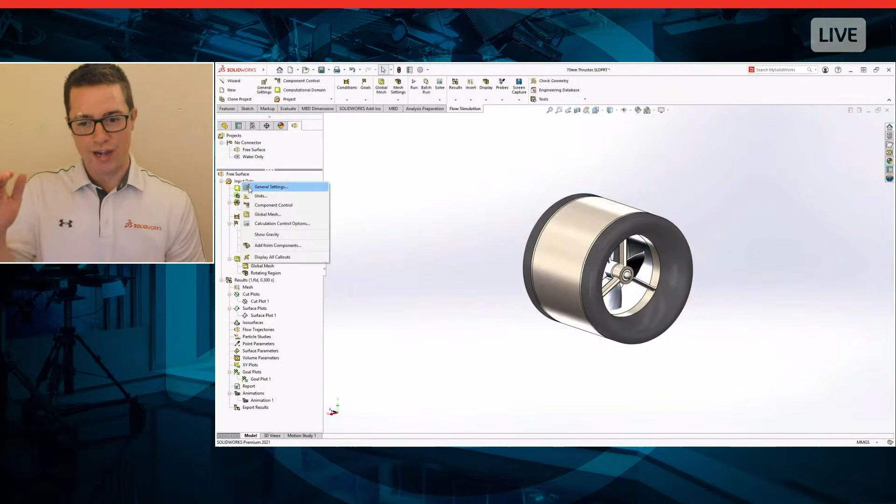So let's take a closer look at how this was set up. Especially with this thruster, we're interested in calculating the torque and power requirements. And since it's rotating, we set up a rotating region. Keep in mind the angular velocity that's been defined here, we can set up a dependency so we can ramp up that power or that speed.

Also, when we jump into the general settings or the wizard for setting up a flow simulation study, we can turn on both free surface and rotating regions. We get into the dependency for the free surface, and we can specify the fluid or the liquid-liquid gas interaction and those default values. From there, we set up some goals, we mesh, we solve, and we can start processing the results.

And especially with free surface, we're doing a transient analysis. So the transient explorer really makes it easy to visualize these results, especially the mixing that's going on here.

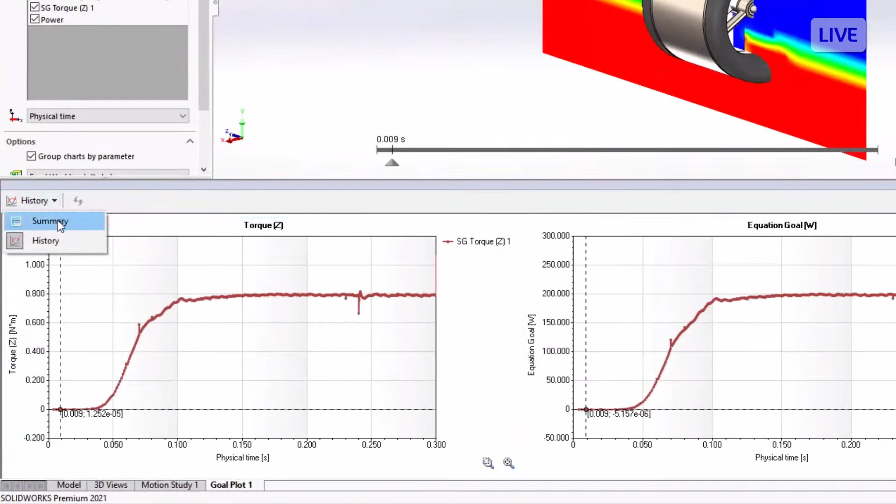But again, what about the power and torque requirements? We can use the goals that we created in the study, and we can look at the history to verify that ramp up. But what was the maximum power requirement? New in 2021, there is a new option in the summary to show you the maximum value and when it occurred. So it's faster to get results, or we can solve more types of studies, and it's faster to process your results now with Flow Simulation 2021.

Wow, Michael, I'm just floored, especially by that mixing, doing the rotational calculation along with the transient and the materials there. I got to ask, what can I mix with this? Can I mix up myself an Arnold Palmer or something like that? Yeah, just specify the initial volumes of lemonade and tea, and then we just have to figure out how you're going to mix it. Maybe a blender?

Sounds like that'll work. Now, Michael, obviously we didn't get to show everything new coming in SolidWorks simulation in 2021. Anything you didn't get to show today that you really wish you had the opportunity to, that you'd like people to go attend a reseller event to learn more about?

Yeah, especially with a lot of product development that's going on, there's a lot of electronics, which means smart devices, which also means there's a lot of heat being generated. And how are you doing that thermal management?

One other enhancement in Flow Simulation 2021 is being able to do an energy balance much easier than before using the flux plot. That's something we introduced in a previous release. It's been enhanced with the click of a button, giving you a nice energy load balance to verify that your study has converged, to see that all the heat going in is properly validated through the analysis and giving you an accurate result for your study.

Hello, SolidWorks community. SolidWorks 2021 delivers the performance you demanded so you can get work done faster. We have focused on quality and robustness, so your tools are more reliable than ever. And of course, many new features you'll be excited to try. Every year, you face new challenges and rediscover that the old ways of working are just not good enough.

Disconnected data, inefficient collaboration. We think there is a better way: connecting SolidWorks Desktop to the cloud. This is 3D Experience Works. You take what you already know and love with SolidWorks and supercharge it with all of the Dassault Systèmes best technology on the 3D Experience platform. Connect, collaborate, and tackle more challenges together. Sit back and take in everything new in SolidWorks 2021 and 3D Experience Works. I can't wait to meet you on the platform.

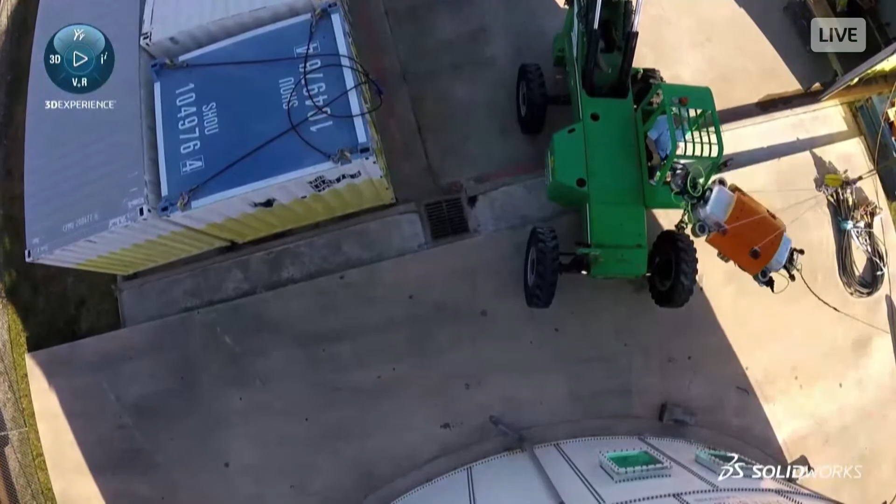Tackling the inspection of dark, harsh, and sensitive environments is the specialty of Square Robot, a startup based out of Boston, Massachusetts. Using advanced submersible robotics lowered into a petroleum storage tank, they autonomously inspect these environments for defects in the storage vessel using state-of-the-art sensing technology. By being able to use robotics for this task, they have reduced costs for their customers while improving accuracy. Their design is focused on safety and reliability for these unique environments, providing maximum uptime and allowing inspections to take place when and where humans would have to otherwise wait for the tanks to be empty.

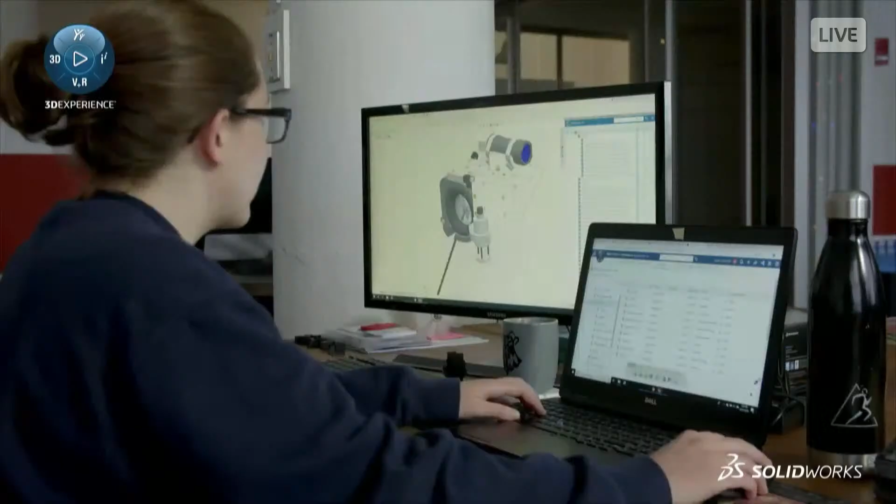Founded in 2016, Square Robot chose SolidWorks and ENOVIA as their go-to design and management solutions. It was critical for them from the start to have the ability to work from anywhere combined with best-in-class design tools.